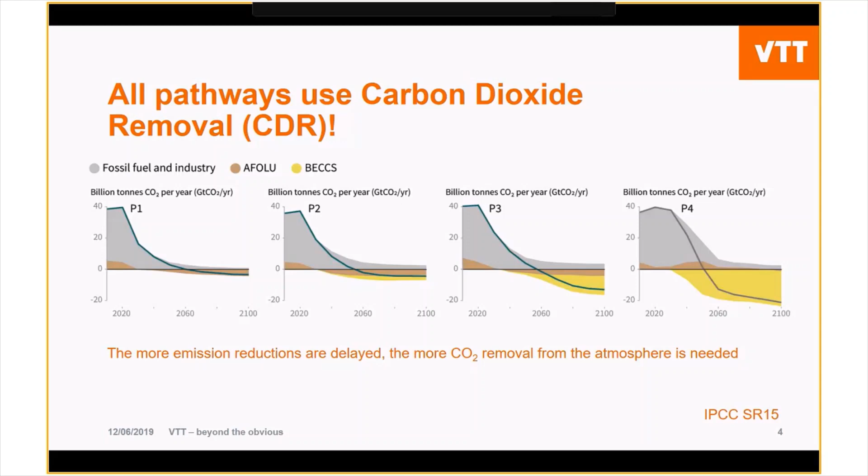Now let's take a bit closer look. The general conclusion is that in order to limit global warming to below 2 degree levels, net zero emissions should be reached by mid-century. Net zero here means that we do not emit more CO2 to the atmosphere than is withdrawn either by natural phenomena or by human technologies. And as I said, all of these scenarios need carbon dioxide removal in order to reach 1.5.

The balance between CO2 removal based on land use changes, forestation, changes in agriculture, and what can be done by technical solutions called Bio-CCS varies, but both exist in all of the scenarios. And going beyond 2050, net zero should be reached more or less by then, but soon after we would have to be carbon negative. We would still need to remove some of the CO2 that we have historically emitted to the atmosphere.

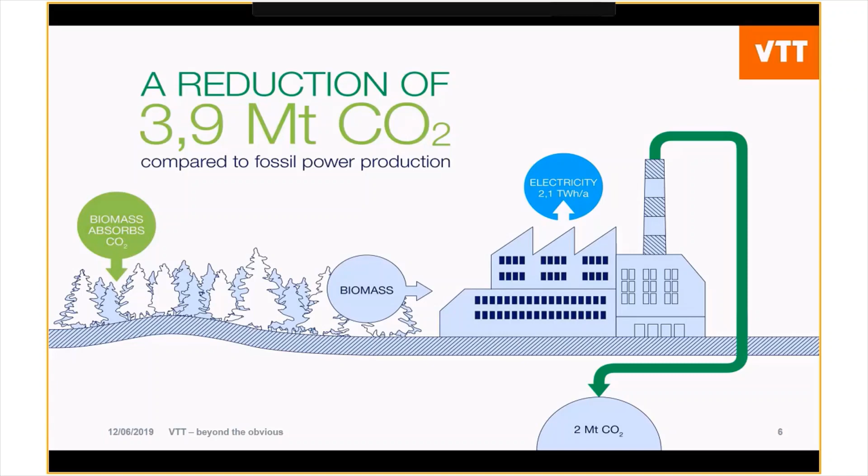Then one aspect that I think is worth bringing up in the discussion of Bio-CCS is CCU, carbon capture and utilization, since it's often used in association with Bio-CCS, and these terms are misinterpreted, either on purpose or by accident, and confused or mixed with each other.

And there's a fundamental difference between CO2 use and CO2 storage, where Bio-CCS, carbon capture and storage, results in net negative emissions. It enables offsetting emissions across sectors and also historic emissions. It removes CO2 from the atmosphere.

CCU, however, is at best carbon neutral. It is not removing significant amounts of CO2 from the atmosphere. There's a small climate impact based on the fact that carbon is bound to the products made of that CO2, but eventually it will be emitted back to the atmosphere.

Then getting back to Bio-CCS, so the storage story. I've been thinking that implementing these kinds of technologies is not only one technology; the story has three different chapters. It has the aspect of biomass supply. As I said, we need to be on a sustainable level, and we need to be using the scarce biomass raw material as wisely as possible.

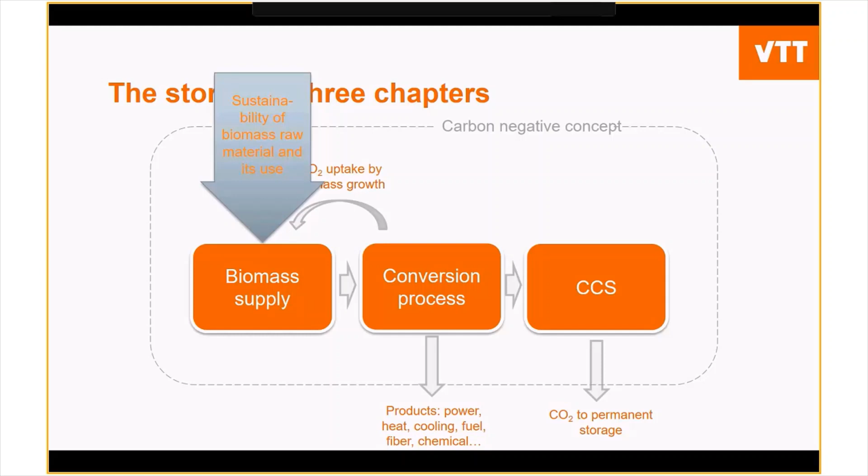That leads to the second step: as I see this, the applications of Bio-CCS, so capturing and storing biogenic CO2, should be connected to the market-driven use of biomass, meaning that biomass is used where it is at its best. And then when it results in CO2 emissions, of course it makes sense to capture those and store them. But this limits the portfolio of both sectors and plants that we can apply this technology in.

And finally, the third chapter of deploying this technology is associated with CCS. What is needed in the capture, transport and storage value chain and technology development pathway to go further? My opinion is that Bio-CCS is not the primary driver for CCS. Instead, conventional fossil CCS is more or less a prerequisite enabling also Bio-CCS.

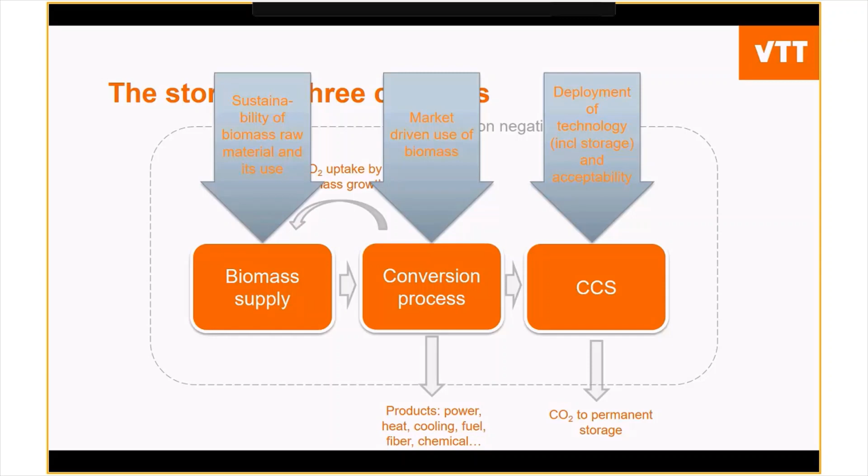And then the final slide of my part of the presentation is how this concerns Finland and what has changed in Finland. Apologies to English speakers because of the Finnish expressions in the slide, but this slide shows scenario work that was done and published this spring. It's part of the official climate and energy strategy work in Finland, and it concerns how Finland can transform to carbon neutral. It's based on scenario work, so different pre-assumptions and different restrictions in the model.

However, also in Finland, where you might already know there's a lot of carbon neutral electricity and energy already available, we would still end up deploying Bio-CCS, so removing CO2 from the atmosphere and offsetting emissions across sectors, if the lowest cost pathways from the societal perspective were followed. This is due to the fact that we still have CO2 emitting industry in Finland, and we also have transportation and agricultural sectors that remain CO2 emitters. And therefore, in certain sectors, we might have to overdo things in order to retain some of these critical sectors in Finland.

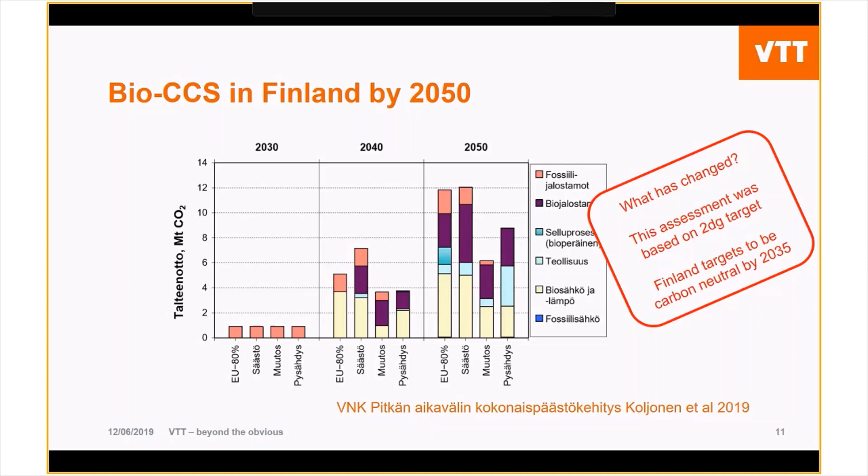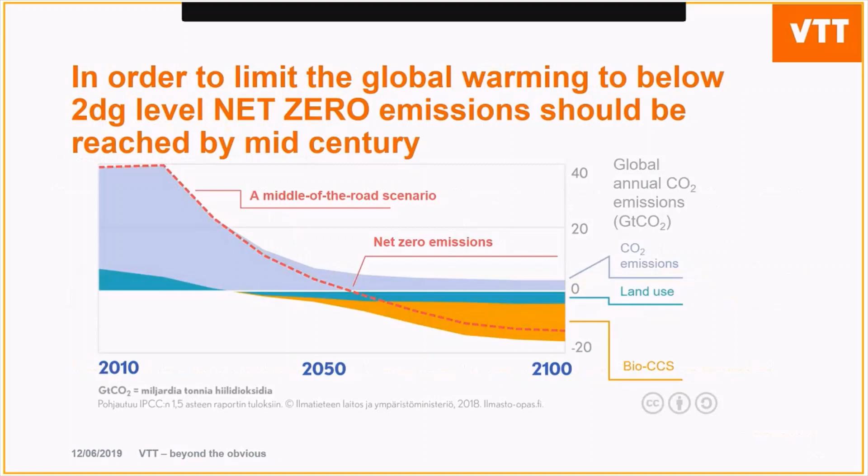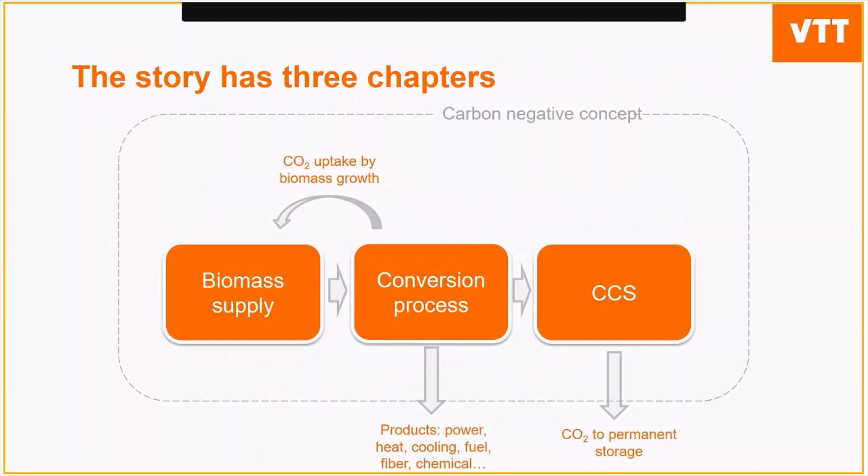The largest operating plants today are the Century plant in Texas, capturing 8.4 million tons per year from natural gas treatment. The CO2 captured here is used in enhanced oil recovery operations. Also, the Shute Creek gas processing plant in Wyoming, USA, captures around 7 million tons per year, also for enhanced oil recovery.

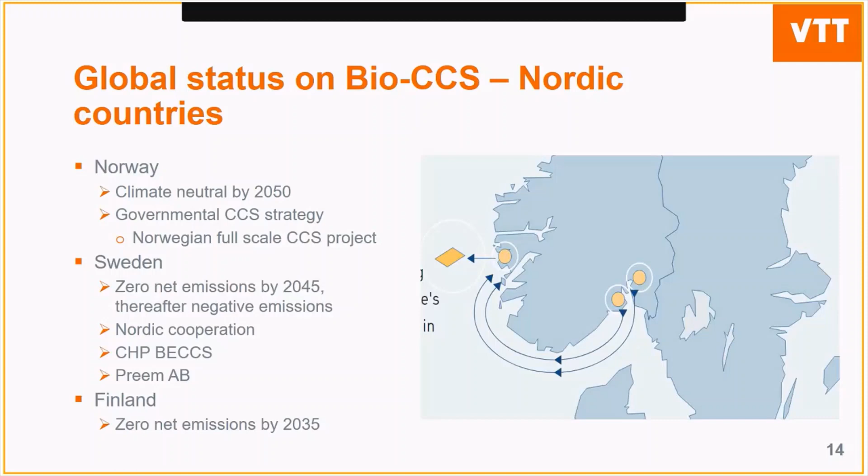So if we take a more global perspective on Bio-CCS, the UK government has recognized the crucial role of CCS in order to reach 80% greenhouse gas reductions. And one of the aims is to commission the first CCUS facility by the mid-2020s.

The Drax power station is in the process of converting their coal-based power boilers into biomass-based boilers, and Drax currently runs a Bio-CCS pilot project, and they capture around 1 ton biogenic CO2 per day. This CO2 is not stored, but Drax is cooperating with Equinor from Norway and National Grid Ventures to scale up the existing pilot plant and create the world's first carbon negative power station. And the timescale for that is somewhere in the 2020s.

And the Netherlands have committed to a 49% reduction of greenhouse gas emissions by 2030, and to increase this to 95% by 2050. And CCS plays a key role in reaching this target, and the aim is to capture and permanently store 20 million tons CO2 per year by 2030. Around 2 million tons of this CO2 is expected to originate from Bio-CCS installations, mainly in connection with waste-to-energy plants.

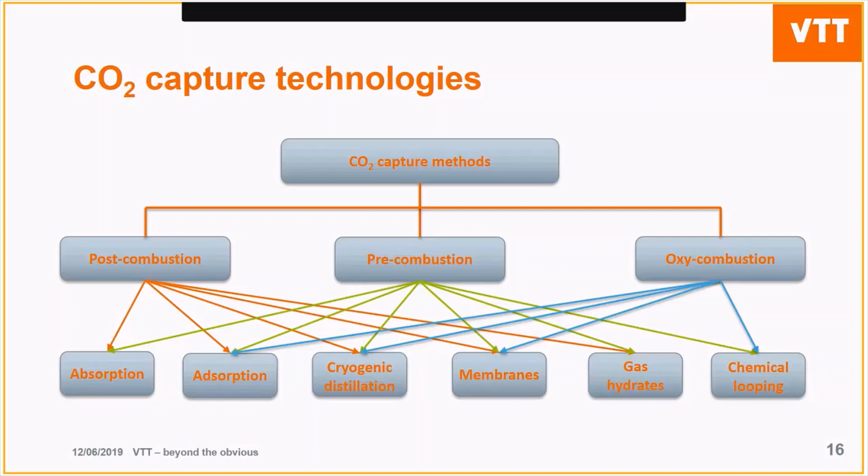So we have three main types of CO2 capture technologies. We have post-combustion, pre-combustion and oxy-combustion, under which we also have different processes. And all these technologies are equally applicable for capturing biogenic CO2. And the most common capture technology is post-combustion capture. This is a commercial process that has been used, for instance, in natural gas sweetening for decades already. And in the next slides, I'll walk you quickly through the main principle of each of these technologies.

So in post-combustion, we actually refer to capture of CO2 from the flue gas after combustion. And the majority of post-combustion facilities are based on chemical absorption with an amine solvent. After removing ash and sulfur components, the flue gas is fed into a CO2 absorber, where the gas phase contacts with a liquid solvent. And the amine then binds with the CO2, which means that the CO2 is extracted from the absorber in liquid phase, and the rest of the flue gas is vented.

And the CO2-rich solvent is heated up in a stripper or a regenerator, and then the CO2 is released and the solvent is regenerated. And the captured CO2 is dehydrated and compressed for transport and storage. This technology uses around 3 megajoules per kilo captured CO2 in the form of low pressure steam, so it does pose a certain energy penalty on the main process. Also, electric power is required for the CO2 compression. And this technology is preferable for gas streams where the CO2 partial pressure is rather low.

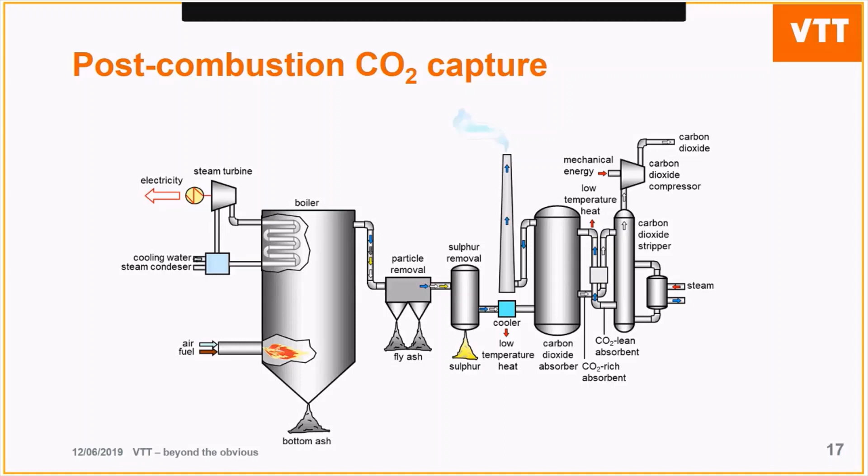If we look at pre-combustion capture, here the fuel is converted into partially oxidized syngas through gasification. Ash is removed from the syngas. Syngas is then shifted to increase the hydrogen concentration. And after the shift reactor, sulfur components are removed and the CO2-rich syngas enters a CO2 absorber. And because the syngas is often at a higher pressure when it enters the CO2 absorber, this technology favors physical absorption instead of chemical absorption, which is more common in post-combustion capture.

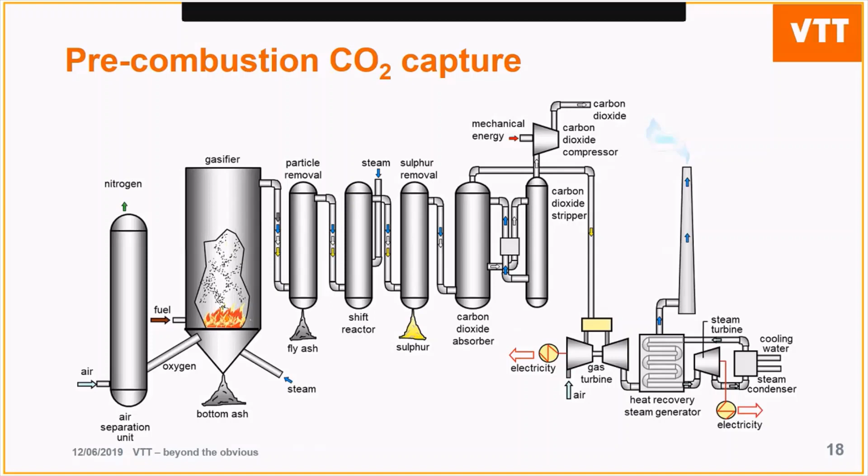And oxy-combustion is combustion with pure oxygen instead of air. And the result is a flue gas that consists mainly of CO2 and water. This simplifies the CO2 capture as there is no need for a specific capture unit. Instead, the CO2 only needs to be compressed and dehydrated before transport and storage.

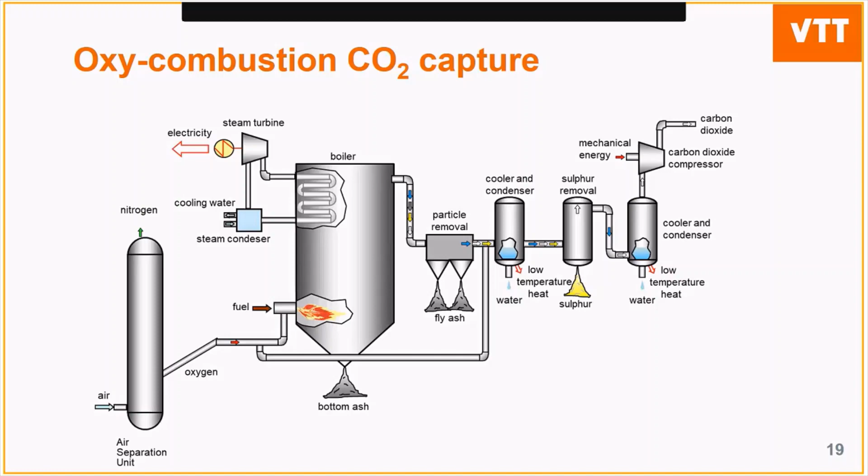So this slide gives an estimate of the potential for Bio-CCS in Finland toward 2025. And the chart only shows the installations with potential to use biomass and those that have potential to install Bio-CCS. So fossil installations are not shown.

On the x-axis, we have the amount of avoided CO2. And on the y-axis, we have the cost of avoided CO2, and the gigawatt hours per year on the bottom line here show the total thermal power available from the bio-based sectors in Finland. So the green bars in this chart show bio-based industries and the blue bars illustrate CCS options.

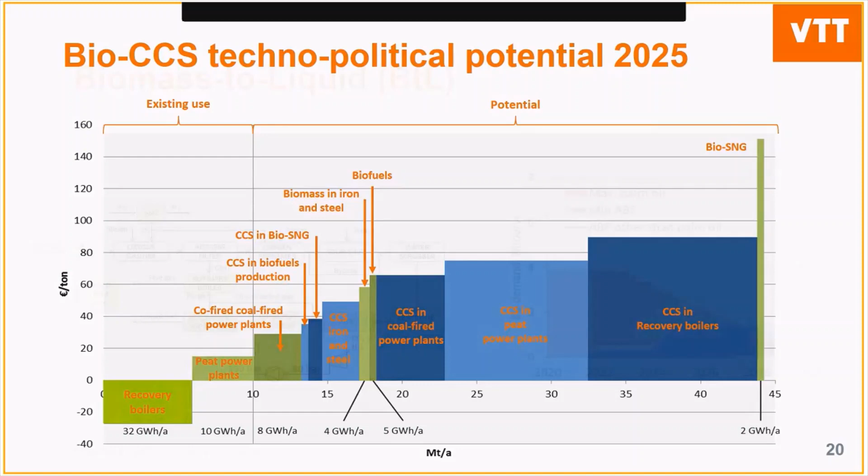So if we dig a little bit deeper into the main sectors with a potential for Bio-CCS in Finland and look, for instance, at biomass to liquid. Here, the integration of CCS with the production of advanced synthetic biofuels enables the production of fuels, chemicals, heat, and electricity, while we simultaneously capture CO2. And as I mentioned earlier, energy penalties of adding CCS can be prohibitive. But in the case of biofuels, both energy and capital expenses can be limited because capture of CO2 is an integral part of the basic process design.

So here, for instance, we're looking at a biomass gasification process to produce liquid fuel. And natural to this process is the compression of shifted syngas, after which CO2 is removed by reaction with a physical solvent such as Selexol or Rectisol. And in this way, CO2 is actually a side stream in the existing process. And the additional investment for implementing Bio-CCS here would be from the CO2 compression, transportation and storage, and potentially also for sulfur removal if that is required.

The potential of Bio-CCS for BTL essentially follows the biofuels market demand, which is then created by the RED II directive. And most of the needed component technologies are well known, and they are already widely in use in various industrial applications, but the integration of these technologies at scale has still not taken place.

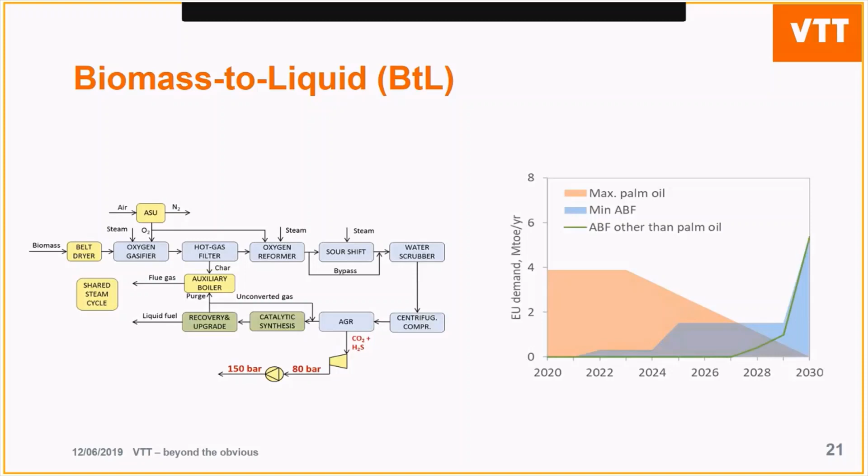So another potential sector in Finland is, as I said, combined heat and power. And one potential technology, in addition to conventional Bio-CCS, is chemical looping combustion, or CLC. Said in a very simple way, this is a combustion method where we use a dual fluidized bed system. And in this way, we have one reactor for the fuel and one for the air, so that the fuel is essentially isolated from the air. And we use a metal oxide acting as a bed material, which then provides oxygen for combustion in the fuel reactor. And after reduction in the fuel reactor, the reduced metal returns to the air reactor, where it is reoxidized for another loop.

And the benefit of this technology is that the exhaust gas from the fuel reactor contains more or less only CO2 with some water. So what would be needed in order to ship this CO2 off for storage is cooling and dehydration and compression for transport. So much like the gasification case in the BTL example.

A CHP plant compared to a condensing power plant has a possibility for higher efficiency gains. In a condensing power plant, we'll lose some electric efficiency, but for the CHP, what is lost in electricity can be gained back in thermal output. So generally, over 90% process efficiency is achievable in CHP production if we have a large heat distribution system and relatively continuous heat consumption.

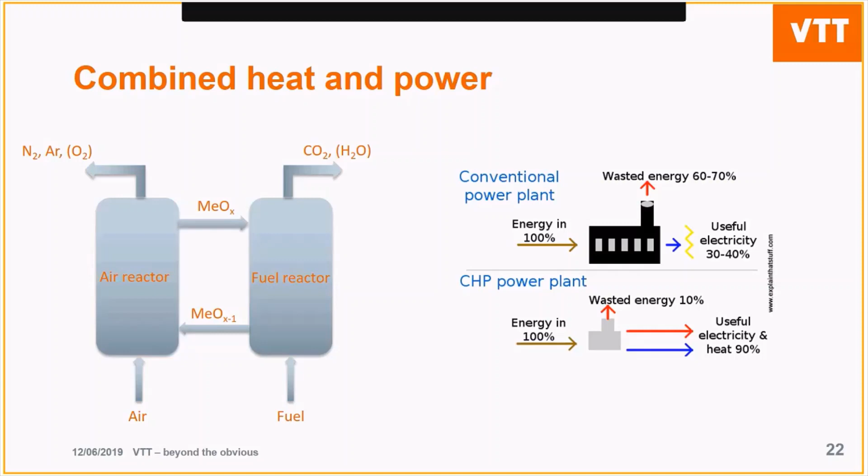So another quite potential sector in Finland is the forest industry.

As we saw a couple of slides back, the forest industry has a significant potential because of the biogenic CO2 emissions. Almost 100% of the emissions are of biogenic origin. So in addition, a typical pulp mill has excess energy available to run the CO2 capture plant.

And a normal pulp mill generally has three major CO2 emission sources. So we have the recovery boiler, the multi-fuel boiler, and the lime kiln. In some cases, the lime kiln may be fueled with fossil fuels. So the cost of CO2 capture from the forest industry depends quite a lot on the site configuration.

And if we look at a standalone market pulp mill, we have excess steam and electricity, which can be taken advantage of. However, when we look at an integrated pulp and board mill, much of the excess steam and electricity from the pulp mill is going to be used by the board mill. In these cases, we would need to generate steam for the CO2 capture plant some other way, for instance, by adding an auxiliary boiler. And then again, this would drive up the cost of CO2 capture.

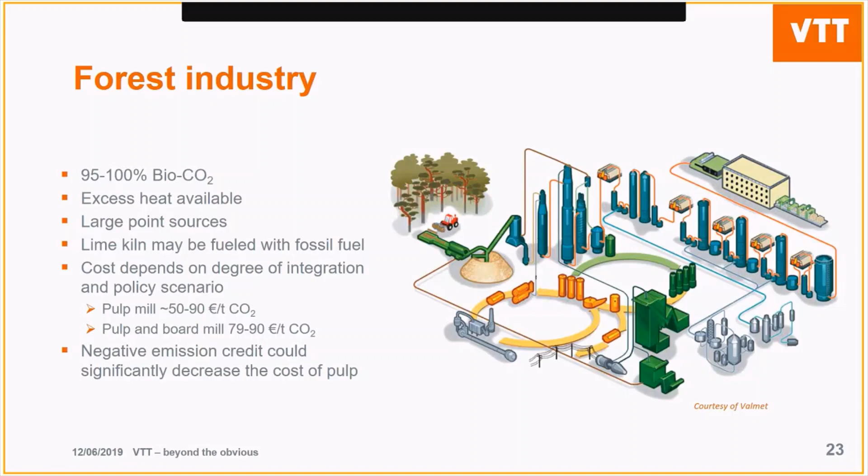It's not too far from the 45Q bill in the United States, which operates with a tax credit of $50 per ton stored CO2, and it is around the same cost as the CO2 captured at one of the largest facilities to date, the Petra Nova facility in Texas. So it's not a completely unrealistic scenario.

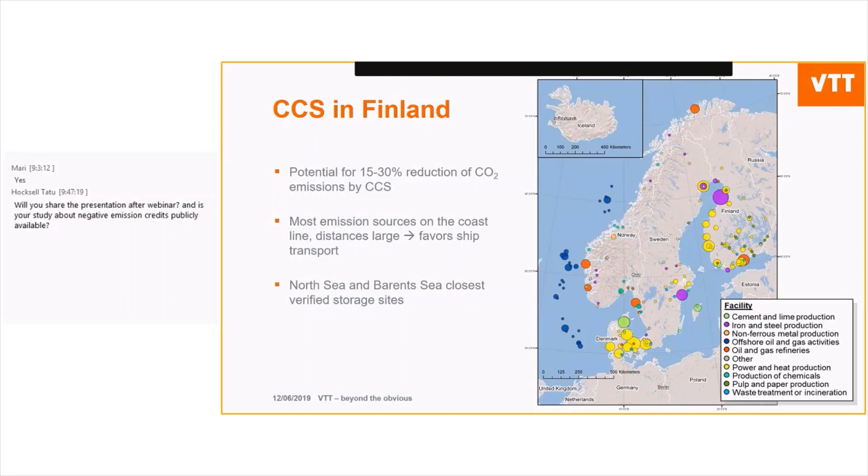We also know that there is a potential storage site in the Baltic Sea, which of course would be a lot closer to Finnish emission sources. However, the capacity of this formation is much more limited, and the formation itself breaks into international seawaters, so development of this site for storage will take some time. So the North Sea formations are optimally situated with short transport distance from much of Northern and Western Europe, and also from the Nordic countries, including Finland.

And in connection with the Norwegian full-scale project, Norway is also looking into possibilities for importing CO2 from Europe in something called European CO2 Transport and Storage Network. Now, here would actually be a golden opportunity for Finland and for Finnish CO2 emitters to link into this infrastructure and actually be part of the development while there is still room to establish practices that will benefit Finnish industry. And one way to do this is to establish a full-scale demonstration of industrial CO2 capture and storage, like they're doing in Norway and Sweden and in the UK at the moment.

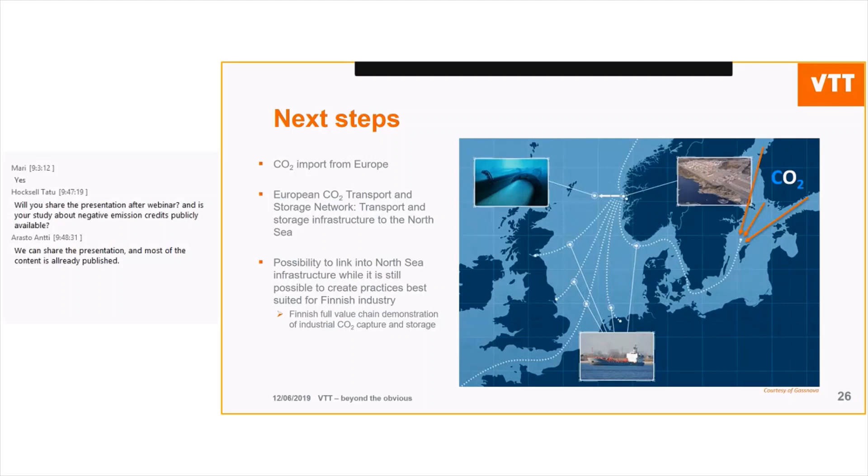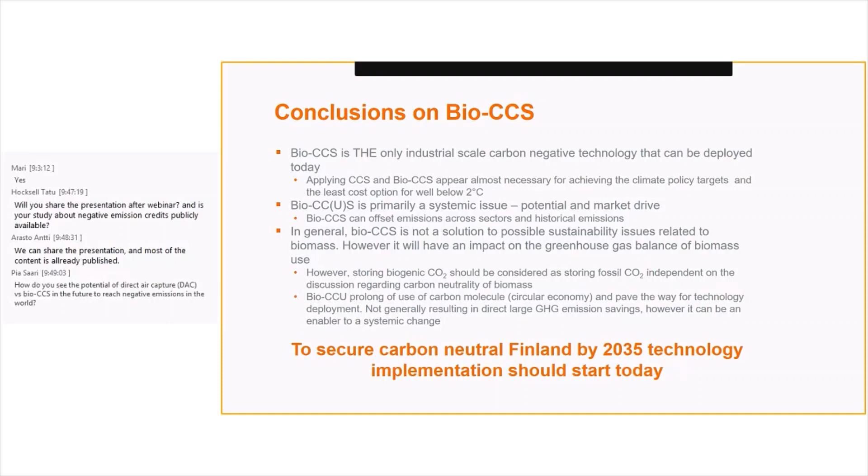So to wrap it up, Bio-CCS is the only industrial large-scale technology to date that can generate negative emissions at the scale needed to reach the climate targets. And large-scale implementation of Bio-CCS is not a technical issue, it's more a systemic issue. And Bio-CCS, as we have heard, is no silver bullet to our climate change challenge. And in general, it's not a solution to possible sustainability issues related to biomass. However, it does have an impact on the greenhouse gas balance of biomass use.

So to wrap it all into one sentence, to secure carbon neutral Finland by 2035, which is a very, very ambitious target, technology implementations should start today.